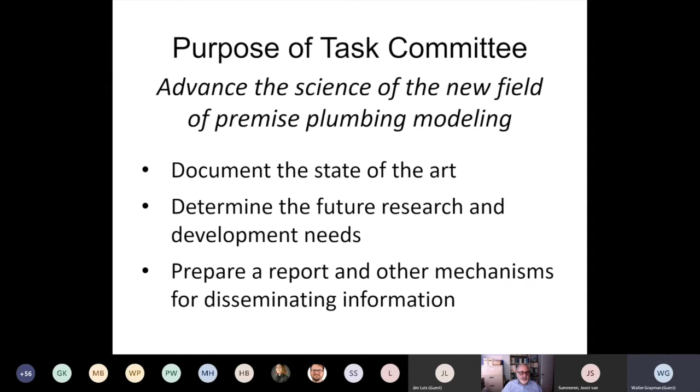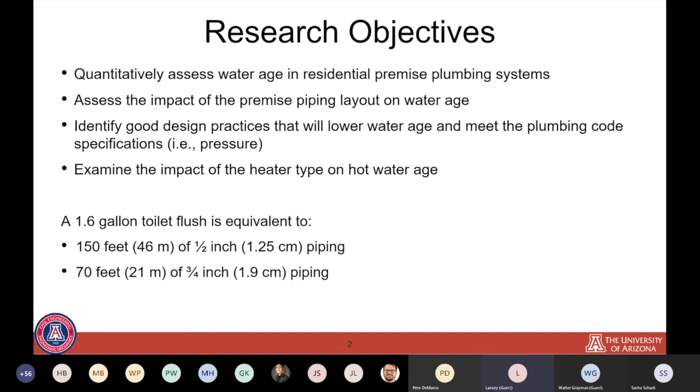So I'm going to shift this now to Sasha. He's going to go through some of the analysis and results, and I'll come back and talk about some further conclusions. Well, thanks so much, Dr. Lansey. So I'm going to start talking about the methodology.

We needed 3 major components. The first one was the premise water distribution system. I'm going to talk more details about that on the next slide. But we also needed a hydraulic model that was capable of calculating water age in pipe flow. For that, we used EPANET coupled with the MATLAB toolkit.

And the third major component we needed is the demands, for which we found in the literature the model by Blokker, which is called SIMDEUM, which we had to code in MATLAB with some modifications. We added splitters to have demands on fixtures of the same type. And we also added a hot and cold splitter, for which we assumed a target temperature, and we achieved that temperature by mixing cold and hot water with the objective of having hot water demand as well.

We ran the simulation for a 90-day period using a 1-minute time step. We considered age zero at the meter, as you can see here. And as Dr. Lansey mentioned, we considered 2 types of water heaters, a traditional or tank heater and a tankless or on-demand heater. I want to see if I can turn on the pointer. Okay.

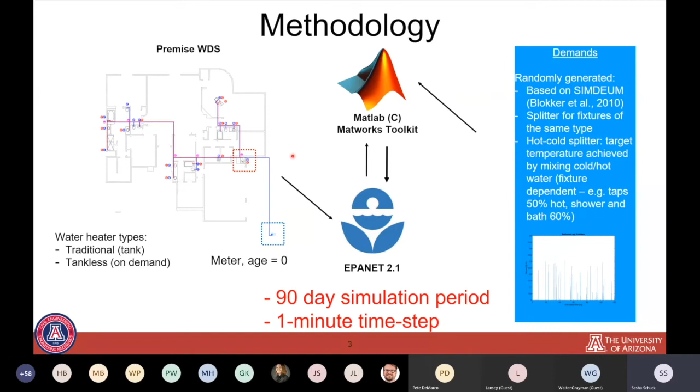So what we compared, as I mentioned, the objective was to change the layout of the premise plumbing system to see if we can improve water age. For that purpose, we tried with 2 different houses. The first one is smaller. It's only 1,300 square feet. It's 2-story, and we assumed 4 residents for that one. And we tried 5 layouts.

House 2 is a little bigger. It's single-story, and it has 5 residents, and we tested 3 layouts. So the other thing we tried, as we mentioned, is that we swapped the traditional tank heater, which we modeled using a first in, first out for the water age, for the water particles. And we swapped that with an on-demand, which is no tank water heater, at the same location, basically. And we designed the premise plumbing system to meet the 2012 International Plumbing Code criteria.

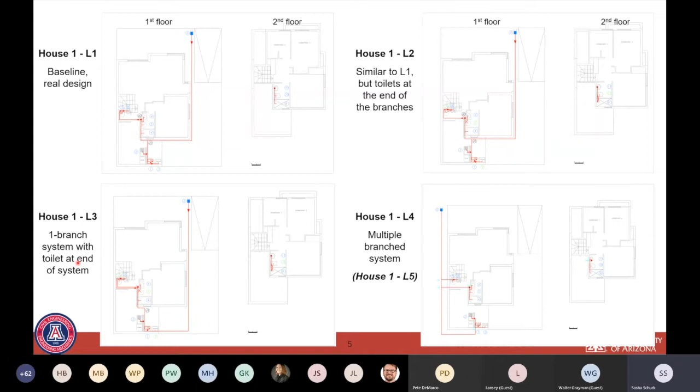So this is just to show you real fast the layouts for house number 1. The first one is just the baseline real design. The second one is pretty much the same as the first layout, but we put the toilets at the end of the branches to test the hypothesis that a good toilet flush will be able to flush or pretty much remove the old water from the system. The third one is a 1-branch system, whereas 4 and 5 are multiple branch systems.

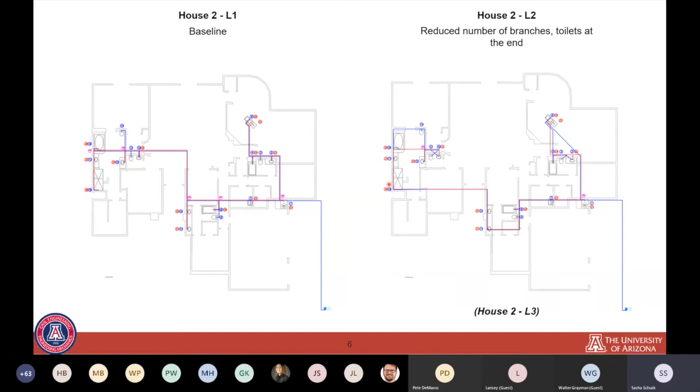And the same approach was followed for the second house. The first one is a real design. Number 2 is just basically trying to connect the toilets at the end. And a similar approach was followed for the third layout.

We looked at 3 statistics: the household maximum, which is the maximum residence time for all fixtures in the household; the mean fixture maximum, for which we calculated the maximum water age for every fixture and then took the average of the maximums; and the last statistic, the mean over time for all fixtures, which is just the mean for all fixtures over the simulated period for all time steps.

So I'm going to jump into the results and conclusions. What we can see here on the left is the results for house number 1, cold system at the fixture outlet. So at this point we can see the 3 statistics in different colors for different layouts. You can see that regardless of the layout, we're basically observing the same results with slight variations for the mean fixture max.

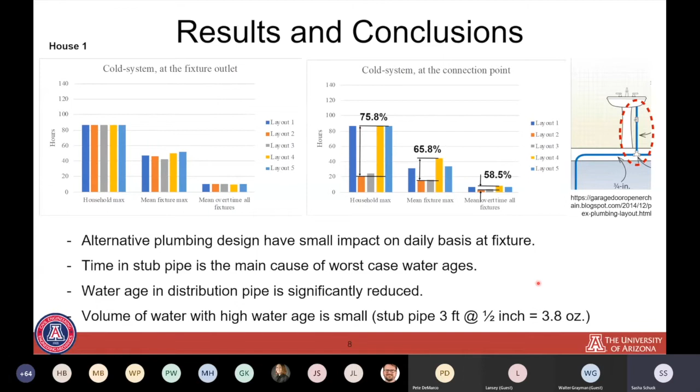So on the left side, I'm showing basically exactly the same results for house number 2, and the conclusions are pretty much the same. We can reduce water age by changing the layout. And if you compare the first layout against the second one, they were pretty much the same, but we connected the toilets at the end of each branch. And we can see that this is an effective way to reduce the water age at the distribution pipe.

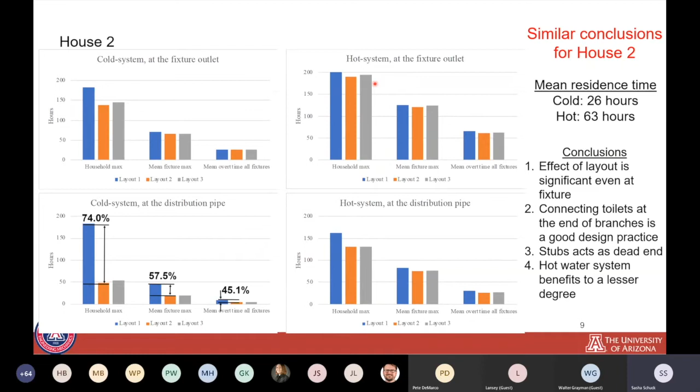Do you wanna? Oh, sorry.

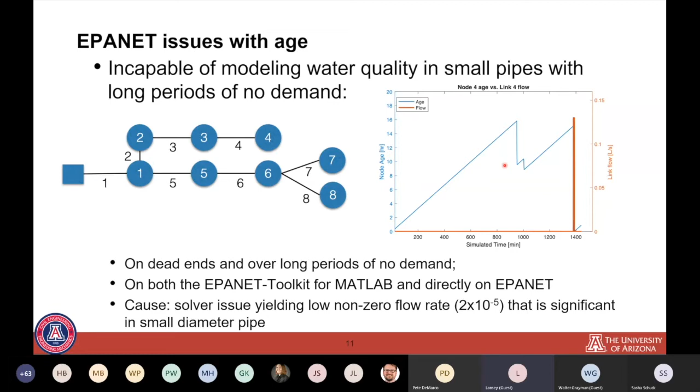So using EPANET is probably not the right algorithm for this, if you can go ahead one slide, Sasha, please. I'm sure KY Pipe and Kentucky people are jumping up and down right now saying yes, you should be using the node loop equations to be able to solve this and get rid of that 0 flow.

So we should be looking at some alternative model. We came up with a solution that was pretty tedious to work through by increasing the demands and increasing pipe sizes to make this work. So that's really number 1, that's a major thing, a major change, and I really hadn't thought about that until last night, that KY Pipe could handle this right off the bat.

In addition, this stub issue is really where the rubber hits the road, I guess, and we really need to understand what's going on microbially at those points. Is it in the water? Is it on the pipes? Can we flush it out with the water?

Extending this work directly, we think looking at looping systems to try to move water through, primarily because we don't know which fixture is being used in the house. We assume that they were uniformly used. So some toilets, for example, may not be used for a long period of time, and we need to get them to flush. We can use the auto flush. I know there's some out there on the market for cats that could cause your toilet to flush every now and then to reduce ages as well.

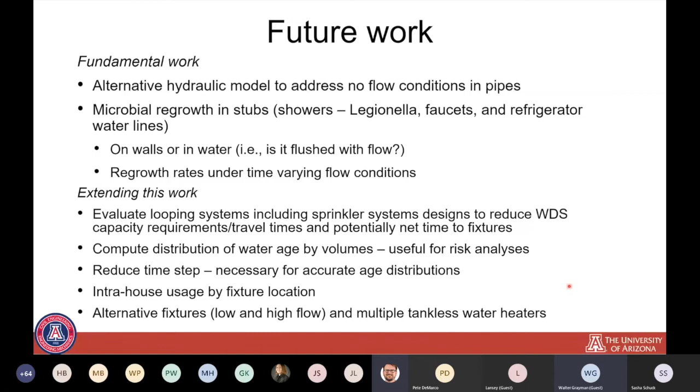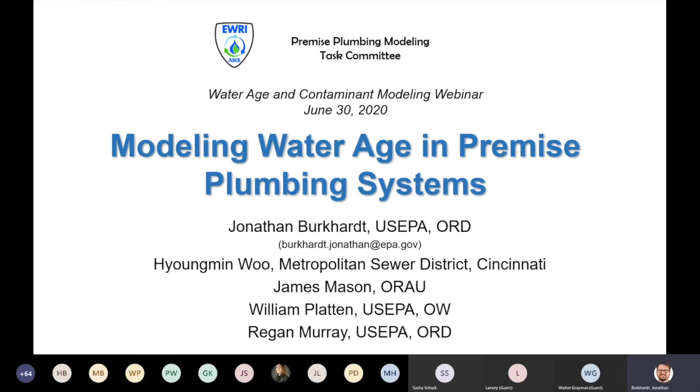All right, hopefully everybody can see my screen. My name is Jonathan Burkhardt, I'm with the US EPA Office of Research and Development, and I'm leading the premise plumbing modeling group here for a few different topics. I'd like to thank my co-authors for all the help they put in, and as always, this is my opinion, not the opinion of the agency. Just before I dig into it, I'll talk about EPANET 2.2, which addresses some of the issues that Kevin raised. We recognized a couple years ago when we started this work as well, about the stagnant flow. I've included a number of slides that are just more informational, and I'm happy to follow up with anybody, but I'm going to sort of breeze through some of the background.

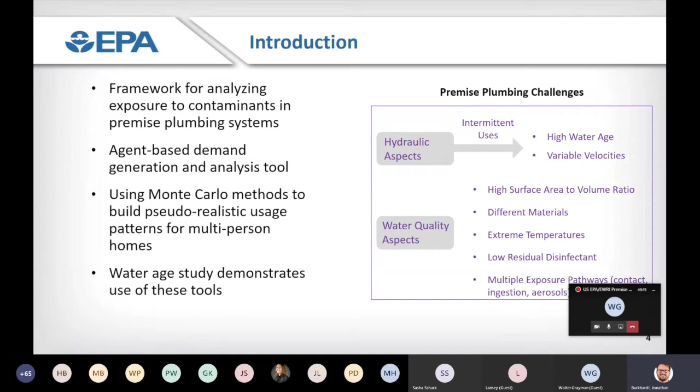We developed an agent-based demand generation model that was deterministic, not probabilistic, although probabilistic is in our future. We used Monte Carlo approaches to look at the effect of pseudo-realistic usage patterns on different numbers of people. One big issue was testing our demand model and looking at interuse frequency. A lot of people will just take the total number of uses, divide that into the hours in the day, and get somewhere around 30 minutes. I wanted to demonstrate whether that's correct or not, and how that changes.

We did look at some of the other models, although we initially decided to use our own. Highlighting some of the work that had already been done, we're actually talking about that more today.

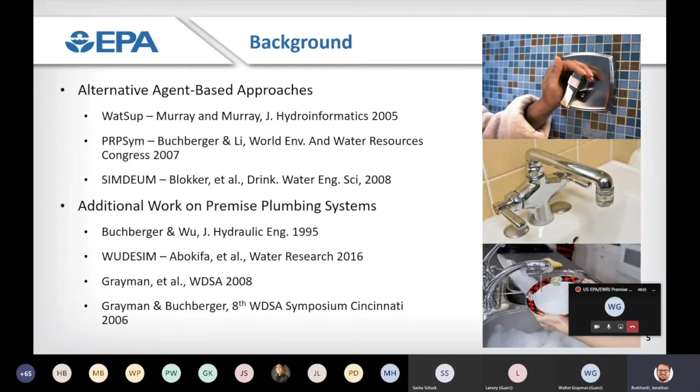Other work we've done using the premise plumbing models looked at lead. We have a lead modeling system in our building, and we've been modeling that, and also looking at the impact of dispersion. That was another side topic which we'll potentially highlight in a later webinar series.

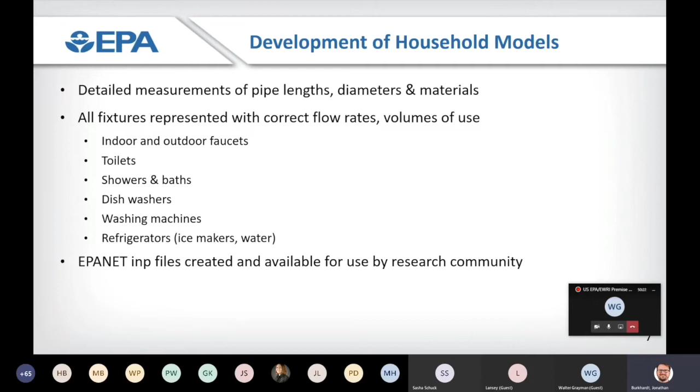As our last speakers talked about, we broke everything down into different fixtures - dishwashers, toilets - and applied different models for each of those usage groups. We modeled it at 10-second intervals to try to get as fine a gradation as possible on the uses.

We have some EPANET input files based on two houses - my house and one of my colleagues. We actually measured all the pipes and used those for today's talk. Again, very similar, and highlights what was talked about in the last slides, that the layout can play an impact on water age.

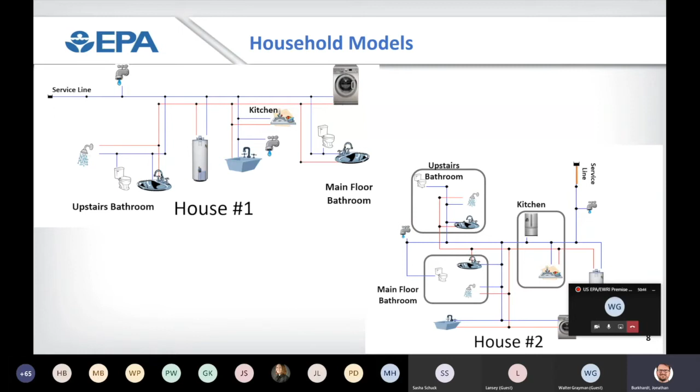I'm going to skip through the next couple slides. I'm happy to talk about these, but we'll be talking about them next month in a webinar series about demand estimation.

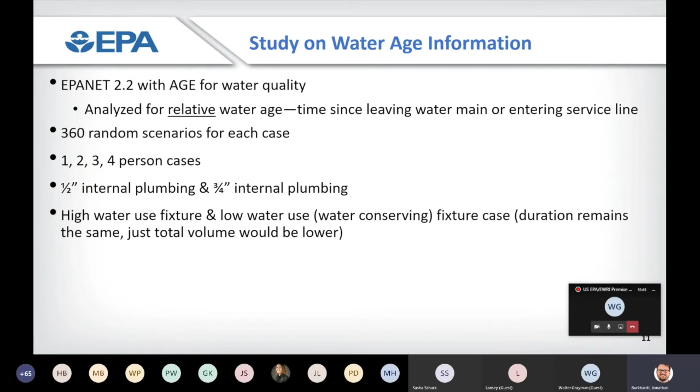We used EPANET 2.2 with water age. Similar to the last talk, this is relative age, just from the water main in the street. Each of these 360 random scenarios were generated for 1, 2, 3, and 4 people. We also looked at the impact of larger pipes in a house, although most houses are plumbed with half-inch, and applied high or low water use fixtures - if a house has fixtures or appliances that use more or less water, how would that impact it? Similar to the last speaker, we looked at the hot water heater as a source of where water age accumulates.

This is comparing results for house 1 versus house 2. Generally, as we'd expect, as more people live in the house, you have more uses, and because of that you get a decrease in average. In this case, plotting drinking water age, the median for four people has about the same likelihood of getting 1 hour old water for drinking, whereas for one person in both houses, you're getting about 3.5 to 4 hours as a median for drinking water.

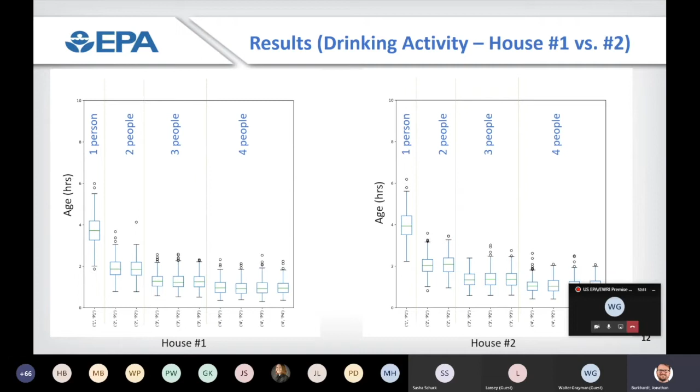On this slide we have cold versus hot water age - sorry for the technical difficulties on my part. On the left we have cold water use. Similar to what was plotted in the last slide, generally as more use or more people are in a house, the uses move earlier in age. Interestingly, on the cold water side, home uses - dishwasher or washing machine activities - have a high probability of very low age because of their high total volume. On the hot water side, home uses are now on the right, again because they're experiencing a lot of volume, but from the hot water heater.

We use the CSTR approximation in EPANET rather than the FIFO as the last speakers. But we can compare and contrast the impact of the hot or cold water use. Next slide.

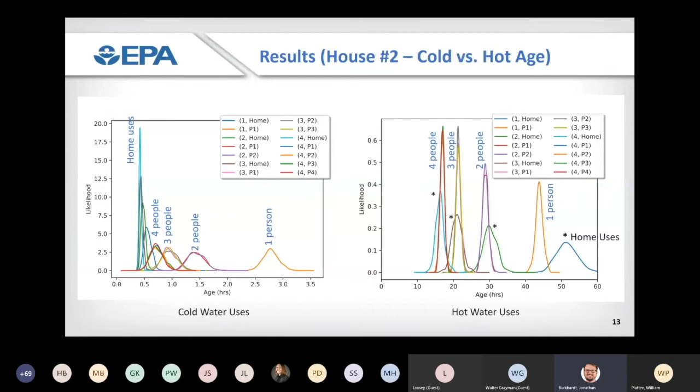So this one again is highlighting high versus low water use, whether the fixture had high or low GPM or total volume used. Again, for 1 or 4 people, showers tend to have very low age simply because of the total volume used. There are subtle differences between 1 to 4 people, generally reducing the age experienced for different activities, and with higher use volume per use, you get a decrease in water age.

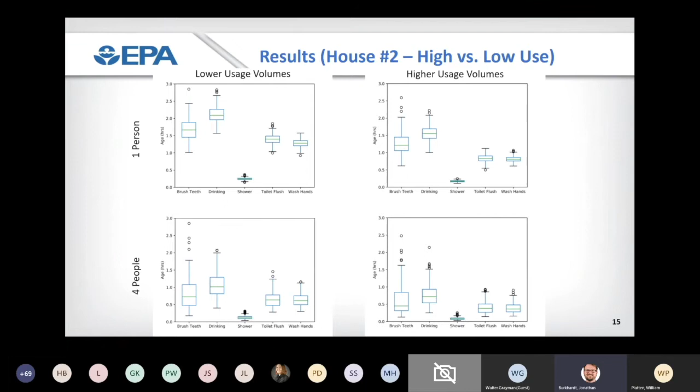Next slide. I think this is the last example, trying to show a similar plot to the last presentation, the maximum experienced water age for a drinking water activity. We can see the work and overnight stagnation periods highlighted, both around 8 hours. But I want to note the shift in scale where the max day versus mean day, the median is even for 4 people in that stagnation period, as we might expect. So one user in one simulation could experience that max stagnation of water, even with 4 people.

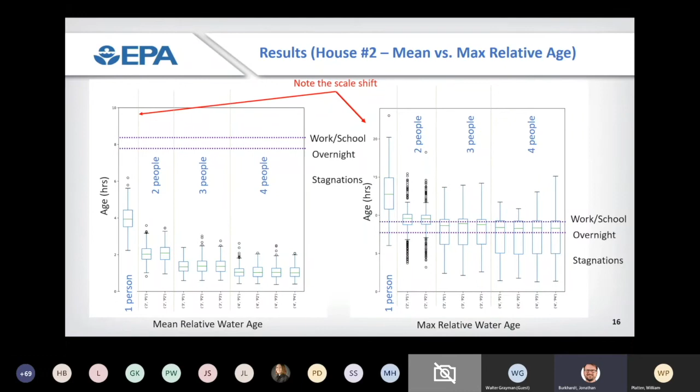The big conclusions from this: similar impacts, the number of people in a home and number of activities will impact the water age as we would expect. The type of fixture can also have a subtle impact. And the max relative water age that a person could, at least occasionally, encounter, can reach that max stagnation or long stagnation within a home.

We're continuing to work in this area, developing additional household models, expanding into probabilistic models. And we're going to be conducting studies on a real home system for flushing and other experiments. So I'll turn it back over to Walter.

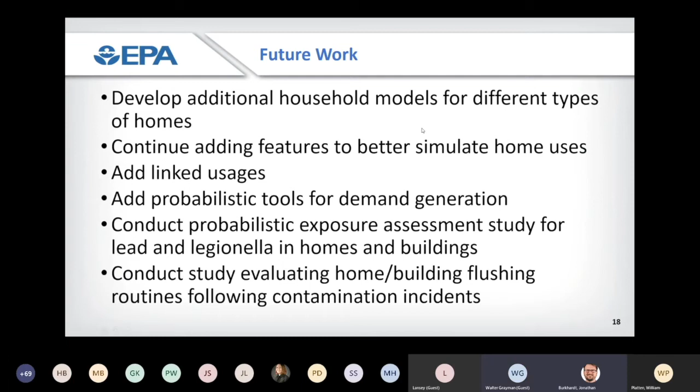Yeah, thank you, Walter. My name is Mirjam Blokker. I work at KWR Water Research Institute in the Netherlands. I'm the same Blokker that Sasha just mentioned, that the SimDeum model was made by. I also will show you something about water age and temperature modeling, where I used SimDeum as well.

A lot has already been shown. The original thought we had is that a branch system has relatively small diameters and short lengths in houses, meaning small pipe volumes, which would more or less mean that every time a tap is opened, the pipe is emptied. So water age is really determined by the time between taps. But if you look at what actually happens, it's not entirely true, because a lot of, especially at the kitchen tap, when you open the tap, it's just for a few seconds, and the pipe is definitely not emptied.

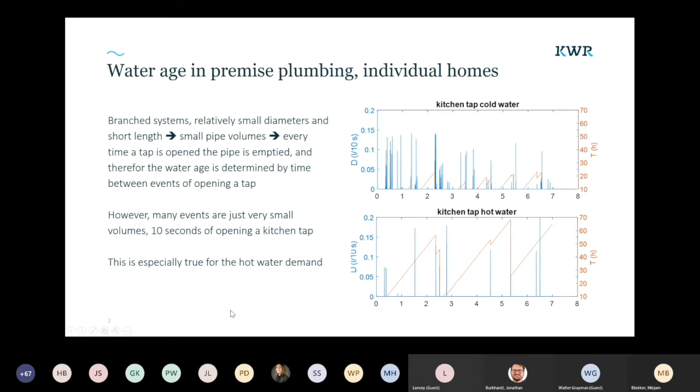So the rest of the presentation is basically about that. It's not just modeling, she also did validation.

The idea is that domestic sprinklers will be very useful in preventing fires or preventing fires from devastating the home. What we do not want is an industrial sprinkler system, because it uses too much water and too much pressure. Also, we don't want that because it requires testing every now and then to ensure the water is flowing, so you actually want to test that. We don't want that for a domestic sprinkler. It should just always work.

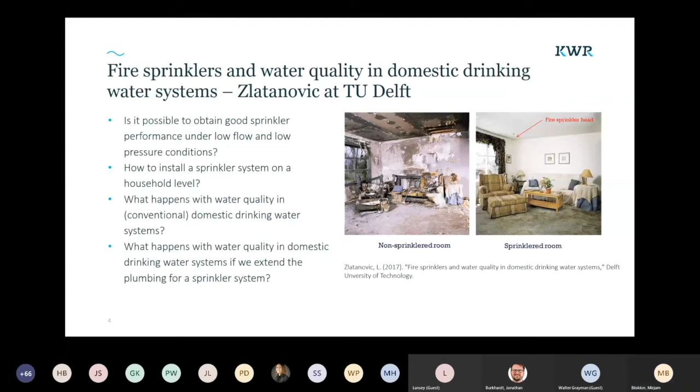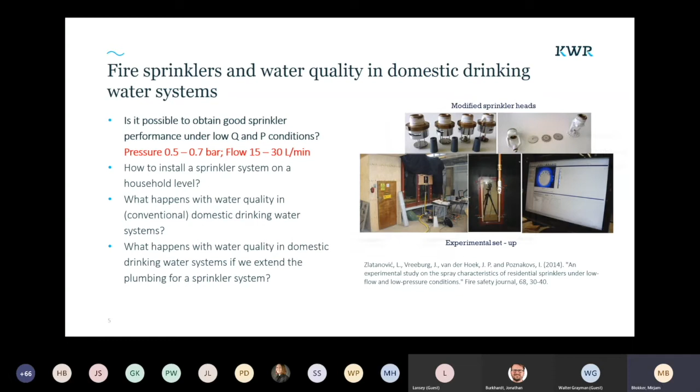So you can read the paper if you like, where she designed and extensively measured a new design for a domestic sprinkler head, and that was very successful. So yes, that works. She thought of different ways of putting that into a drinking water installation.

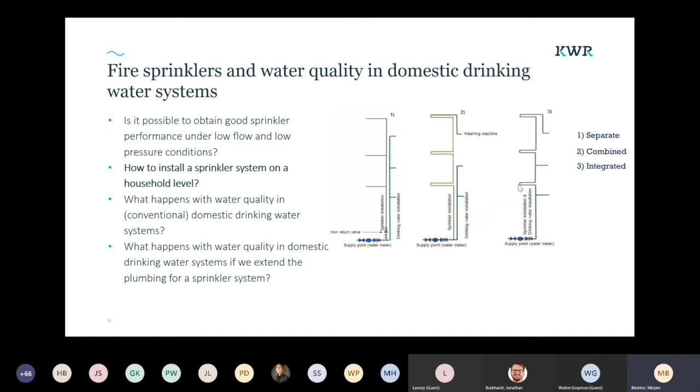So you could have two separate systems, one for drinking water and one for supplying the sprinklers. You could have a combined system where at least there's part of it being connected. So in this case, the washing machine is at the end of that, so there is some continuous flow. And then there's a fully integrated system where your drinking water installation is actually being extended in such a way that you could have a sprinkler somewhere in the middle of your ceiling, and it's all connected to the same pipe system.

So she built a really nice installation somewhere in TU Delft in the old elevator shaft. And then these actuators had SIMDEUM demand patterns on them for a whole year of probabilistic demand. So every day that the measurement took place for more than a year, every day was different. Each day was a different unique set of tap patterns. So there was a specific tap that simulates the kitchen tap. There was a tap that simulated the washing machine and the dishwasher and so on.

And we modeled what we would expect in temperature and other water quality related issues. So temperature, for example, was modeled and measured. So this validated the temperature model, which was very nicely done. And the results showed that it is possible to have the sprinkler system work and that the temperature model is able to predict the dynamics.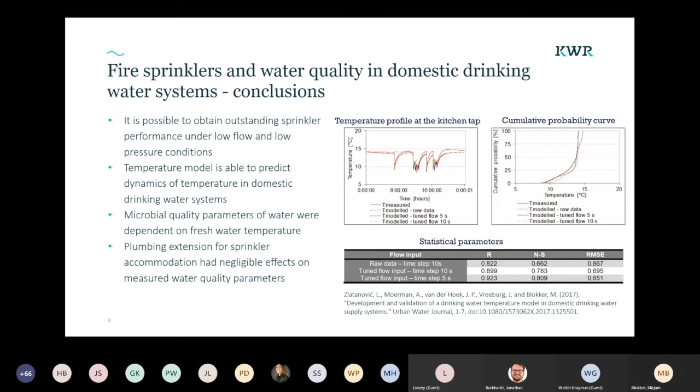Another project that we recently finished has to do with what if the temperature in your connection pipe or maybe the meter box is getting really warm. With the energy transition, which is a really big thing in the Netherlands, we expect that more and more district heating pipes will be close to our drinking water system. So the water might be really getting warm in the connection pipe, and then you would flush that out, but how does that travel through your distribution system or through your installation? So this is what we looked at.

And the graph here should show temperature. Well, anyway, we looked at the temperatures, and what you can see is that when you open the kitchen tap, the cold side, it might be such a short time that you do not really see the hot water getting there, because it's not the full pipe volume that's being flushed out at the kitchen tap. So this water travels a little bit towards the kitchen tap, but then stagnates in the pipe, and then it could cool down again. So a lot of water is getting warmed up in that connection pipe and then cooling down in your system again, and some of it might be going out the tap, but lots of it is just sitting in that system.

So that might have an effect also on the biofilm in the pipes. That would be a very nice next study object. So what we see is the water age is determined by water demand and the fixtures and volume of upstream pipes and the time between water uses. And that also means that there is a flaw in SIMDEUM for the hot water, because people will not just open the tap and then close it when they have enough water. They will close the tap after they have enough hot water. So that should be included. And water age influences interaction with pipe wall and joints and fixtures, etc. So it has an effect on water quality.

We looked at temperature. The next project we're starting on is the leaching of lead. And then biofilm growth is the next step for that. And for temperature modeling, this is an interesting thing: there's a difference between vertical and horizontal pipes in how fast they heat up, depending on room temperature, because convection around vertical and horizontal pipes is different. So in EPANET and EPANET-MSX, we had to really set a value to each and every pipe, saying it's a horizontal or a vertical pipe.

So future work that we need to do, or that we're working on, that we think is important to take into account, probably with some sort of an automatic way, is determining which pipes are vertical and horizontal. We do not want to model just pipes, but also the joints. That's also where lead could be.

I just want to acknowledge my co-author, Rakesh Bahadur, a colleague who works out of our Reston, Virginia office, and also two other members of our project team, Walter Grayman, who developed the model and performed a lot of the modeling work that you'll see today, as well as Rick Borgia from Arcadis, who did building and plumbing assessment for this project.

So this project dealt with contamination modeling in high-rise buildings. It was a New York City case study. Next slide.

So the goal of this assessment was to identify equipment and components of a typical domestic water distribution system in high-rises and large venues in New York City, and to understand how these systems work. So we developed some models to look at the movement of contaminants within different types of buildings. The focus of this presentation will be on the high-rise building.

We also considered in the modeling both accidental and intentional contamination events, and also contamination both from external sources as well as internal contamination. The funding for this was provided by the New York City Department of Health and Mental Hygiene, the Office of Public Health Engineering, and we worked closely with their chief engineer, James Luke, in performing this study. Next slide.

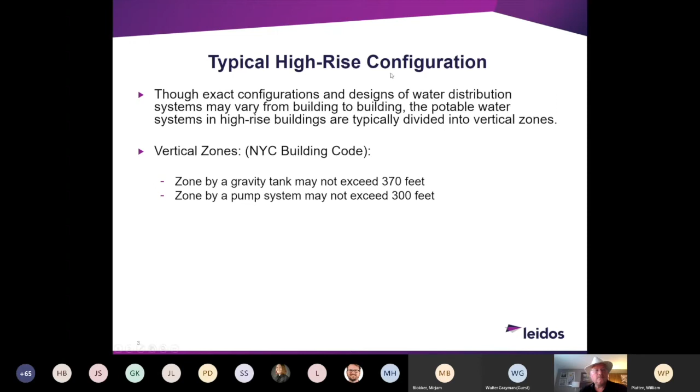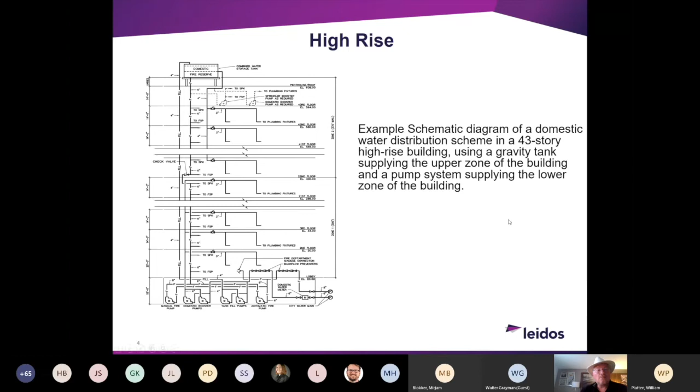If we look at gravity house tanks, they serve as the main water supply of typical high-rise buildings in New York City. Due to the excessive height of high-rise buildings, it became a disadvantage to use a pump to supply and maintain the pressure and flow required for the domestic water distribution. This is especially true in very tall buildings, where the use of gravity storage tanks started and has become very popular.

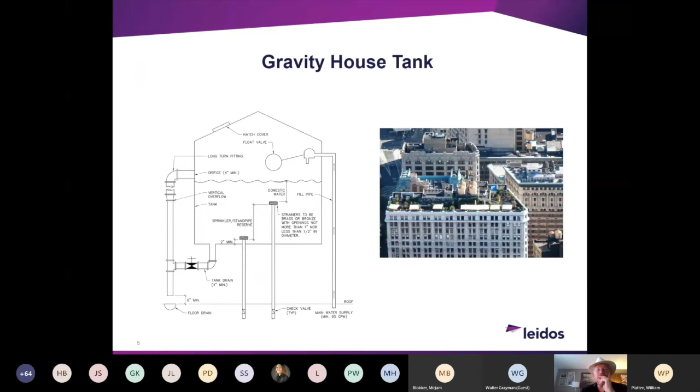So if we look at the flow and pressure characteristics, typical design flows for large commercial buildings can range from around 65 to 400 gallons per minute per service connection, depending on the number of house tanks, booster pumps, and fill pumps in a building. The length of the connection and the presence of appurtenances such as valves and fittings vary depending upon the specific local requirements and also conditions.

A service connection to a building is typically designed to a maximum working pressure of about 200 psi. However, the internal plumbing fixtures and equipment are generally designed to lower working pressure. Thus, it requires a pressure reducing valve to reduce the incoming pressure before supplying the plumbing fixtures and the equipment. Next slide.

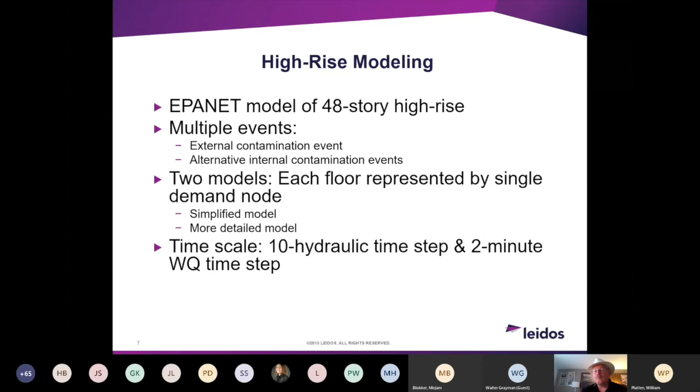So in our high-rise modeling work, in order to test the potential impacts of a contamination event in a high-rise building, hydraulic models representing two generic large venue buildings were constructed using EPANET. The models were used to investigate the movement and spread of contamination for alternative contamination scenarios. And scenarios investigated included different locations for the injections and different injection quantities, durations, and times. Next slide.

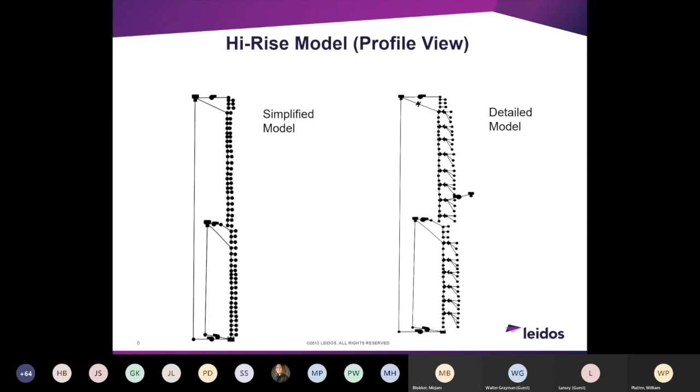So we developed 3 high-rise scenarios. Actually, there were more than that, but I'm just going to talk about these 3 due to our time constraints. First of all, there was external contamination of the distribution system, and in this case, it was a 400 milligram per liter concentration inflow for 3 hours starting at noon. There was an internal contamination of a roof tank, a 200 milligram per liter instantaneous contamination starting at midnight.

And then finally, the third scenario was an internal contamination event, 55 gallons injected over a 2-hour period on the 27th floor of this building. And there were 2 cases that I'll talk about here. One was a low head pump or a cross connection, and the second was a high head pump. Next slide.

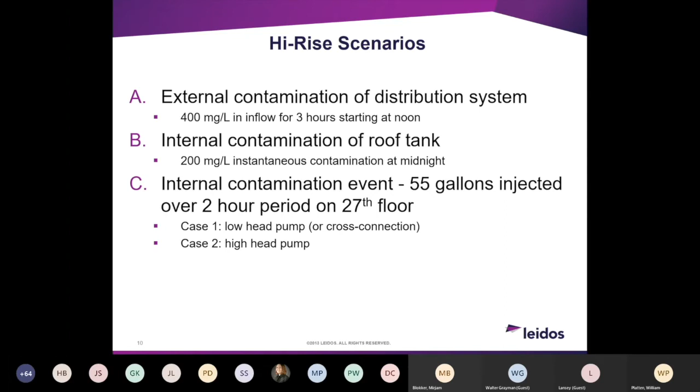So let's talk about that first scenario and a little bit of the results here. So as illustrated by the pump flow and the water levels in this slide, during the nighttime when water usage in the building is very low, little water is used from the tanks, and as a result, the pumps do not need to be operated to fill the tanks.

With the increased demand when the workday starts, the water levels in the tanks quickly drop and the pumps cycle on around 7 a.m. The resulting concentration in the roof tank is shown here in the lower left. So as illustrated here, the concentration is above the assumed LD50, which was set to 100 milligrams per liter in this case, for approximately 6 hours.

It then dropped to a lower concentration as the tank subsequently refilled with clean water. And as illustrated, a spike in concentration in the tank resulted in an increase from 135 to 155 milligrams per liter, and that occurred around hour 18, which is about 3 hours after the initial contamination period ended. This behavior was caused by the residual contamination that remained in the riser pipe after the pump was shut off about 1:30 p.m. Next slide.

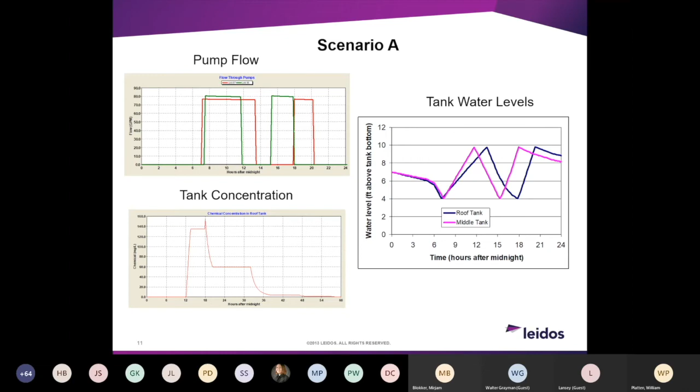Okay, can we move to the next one? Scenario B. I changed it. It's okay. Just catching up, I think. Sorry.

So here we're looking at the second scenario where there was a tank contamination, here on this curve. So in this example, the top tank is instantaneously contaminated at midnight, resulting in a concentration that is twice the LD50. So as illustrated in this figure, because of the low water usage during the night, the pumps do not operate and the concentration in the tank remains at the same value until about 7 a.m. when the pumps start in order to refill the tank. That results in a drop in concentration throughout the day due to dilution. Next slide.

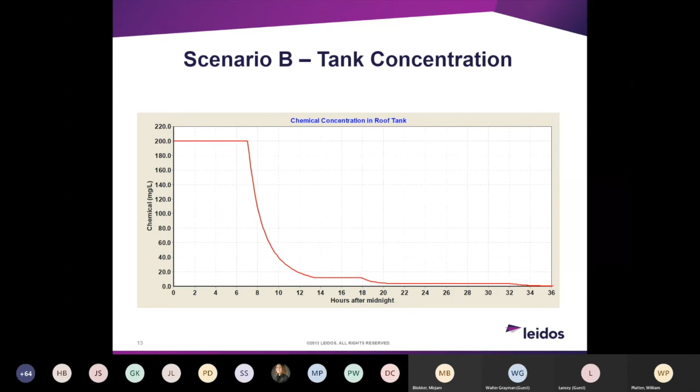Okay, so this is the final scenario, and we're just looking at nodal concentrations here. In this scenario, on the left here, a low head pump is used to inject the contents of the 55-gallon drum over a period of 2 hours starting at noon. The movable tank and pump combination is attached to a fixture such as a utility sink on the 27th floor. The pump is capable of overcoming the pressure on the downstream side of the PRV, but cannot overcome the pressure on the upstream side. As shown in the figure on the left, as a result, the contaminant affects the water usage on floors 25, 26, and 27 served by the PRV on floor 27.

In the next case, shown on the right, a higher head pump is used that is capable of overcoming the pressure on the upstream side of the PRV. However, as long as the demand on the downstream side of the PRV, which is associated with the usage on floors 25, 26, and 27, exceeds the rate at which the contaminant is injected into the fixture, the contaminant will stay within the 3-floor zone and not affect the other floors. When the water usage on floors 25, 26, and 27 is set to 0, only then will the contaminant move through the PRV into the main riser. So as shown in this figure, when the contaminant enters the riser, it will mix with the water that is coming from the tank and move with the flow, i.e., towards lower floors, resulting in contaminated water feeding those floors. Next slide.

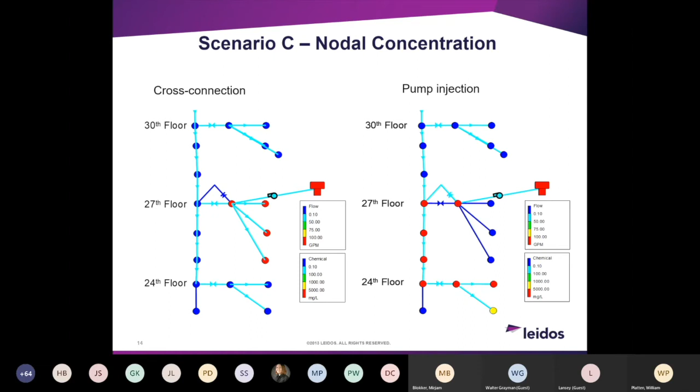So just to summarize, hydraulic models proved to be useful for estimating the spread of the contaminant and the resulting human exposures. And several different scenarios were modeled for the high-rise and also low-rise buildings, which I did not present here, to demonstrate the likely consequences of various contamination schemes. So impacts depended upon the location of the entry point, the duration of the event, the time of the event, and the quantity of contaminant introduced into the system.

And with respect to future work to continue these types of studies, there would need to be additional information defining the demand patterns. We had a very simple demand pattern here. Defining the range of operations and designs of these buildings; we only looked at a small handful of buildings, high rises in New York. Looking at additional scenarios, and then verification and validation of assumptions and results.

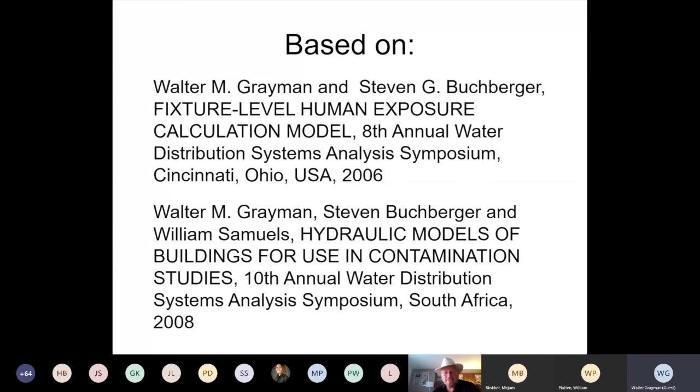This was in the era when water security was a big issue. And the purpose was to demonstrate the calculation of human exposure patterns from a hypothetical contamination event and its impact within the house. We wanted to look at and demonstrate different methodologies for logging water use within a house, and also as a proof of concept for modeling movement of a contaminant through a house.

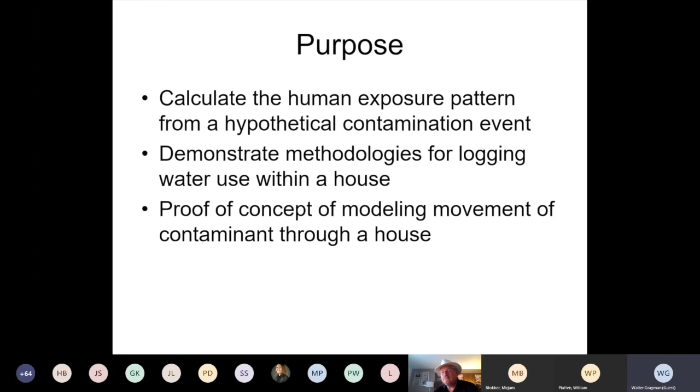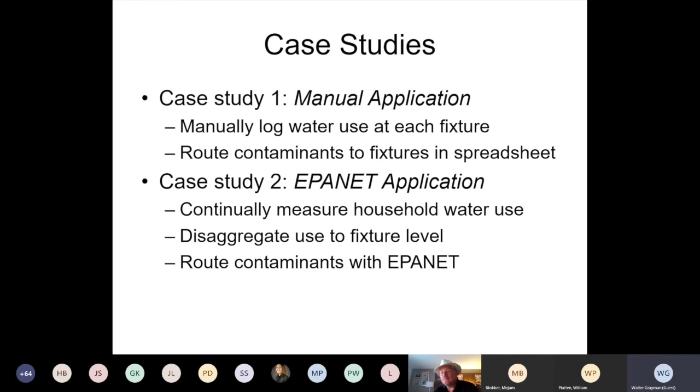Remember, this was almost 15 years ago. We did 2 case studies. The first one was really a manual application using spreadsheet. And the second one was an EPANET application, more similar to what we've been hearing today.

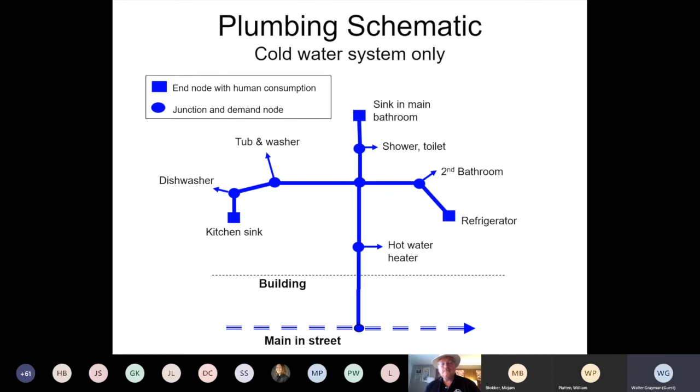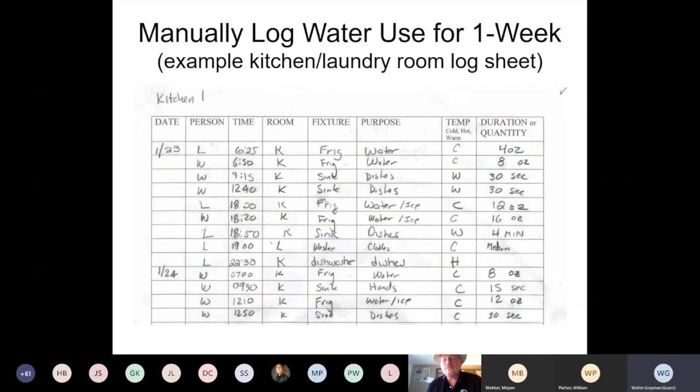As I mentioned, we manually logged every water use for a week. My wife did not appreciate that, but this is an example logging sheet where we were at the time, the fixture, the purpose, the temperature, and an approximation of the duration or quantity. This was transferred to a spreadsheet, and really an event-based one, which allowed us to do the calculations as the water moved through the system towards each one of the demand-oriented events.

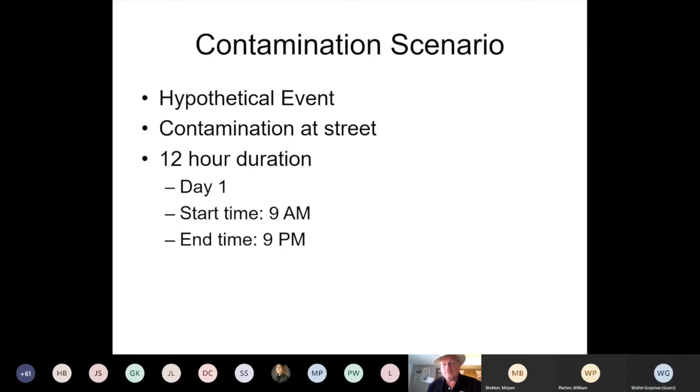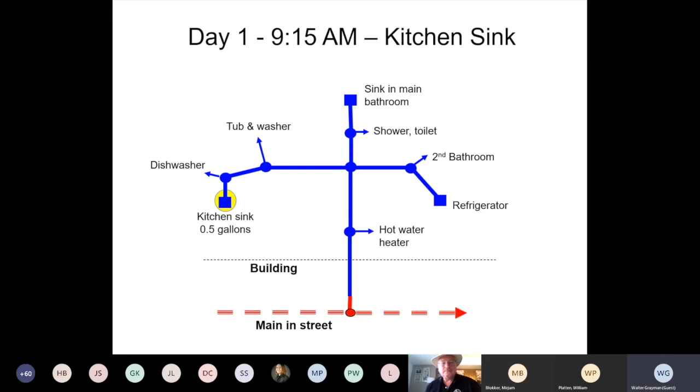Contamination scenario we used was a 12-hour duration on day 1, starting at 9 a.m. at the street and ending 12 hours later. So I'll do a very quick little animation and just show it as this is a start. We see at the street, it's contaminated, and various events occur. It's a fairly long driveway, so it took 9 hours for the contaminated water actually to reach the building. And then as various uses were taking place, it was drawing it into the building. I'm showing only example events.

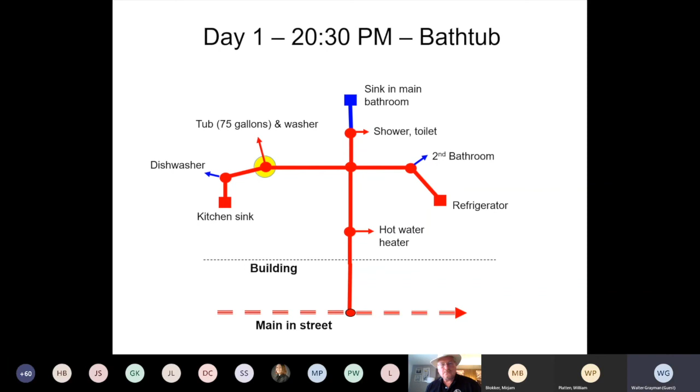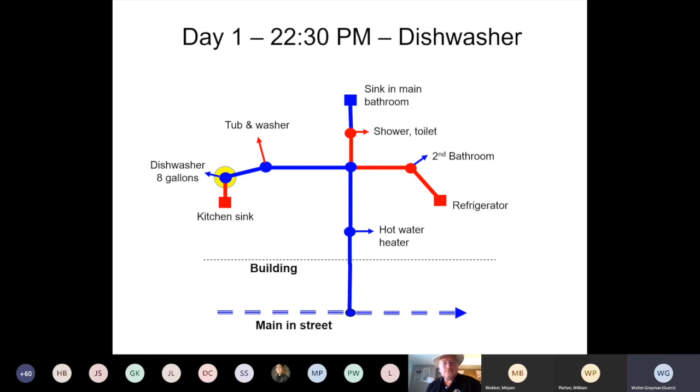And at 2100, 12 hours later, the contamination ends, and we continue to do the routing as the clean water enters the building. And it was 27 hours after the start. No contamination remains in the house in the cold water system.

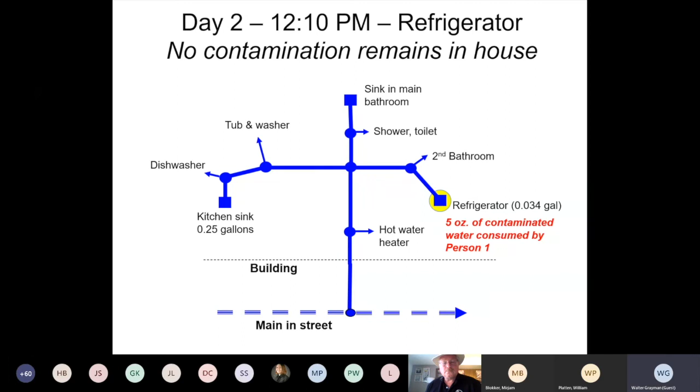We did various statistics in terms of the amount of water that was used, the amount of water that was consumed, the amount of water that was contaminated, and the exposure by 2 different people. And as I indicated, it took 9 hours for the water to actually reach the building, and then an additional 15 hours before it was totally clear. And we feel this demonstrated the feasibility of modeling contaminant movement in the house.

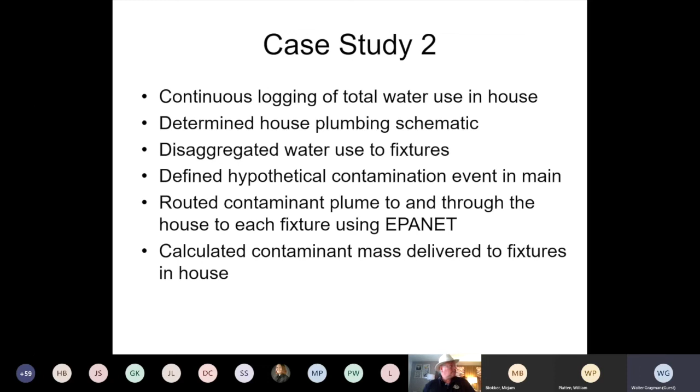Case study 2 was the more sophisticated one, and Steve used continuous logging of total water use in the house, determined the house plumbing schematic, disaggregated the water use to the fixtures, defined a similar hypothetical event, and then routed the contaminant plume to and through the house to each fixture in EPANET and calculated some statistics.

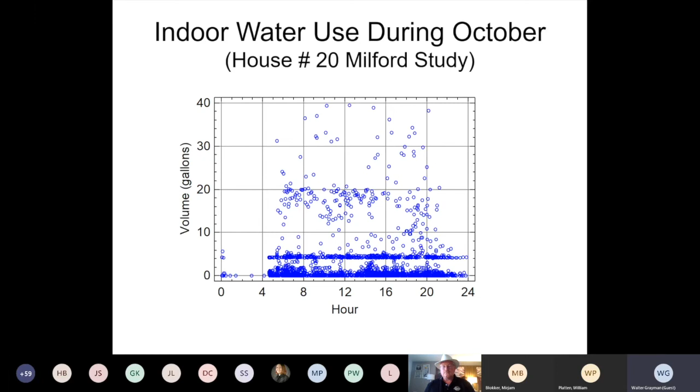These are some results from a very well-known study that Steve did back in the early part of the century in Milford, Ohio, and it shows the indoor water use during the month of October. And he went through some various mechanisms for simulating disaggregated daily hot and cold water demands, and then into a stochastic fixture level water use. And I'm sure he'll be talking about this a lot more at next month's webinar.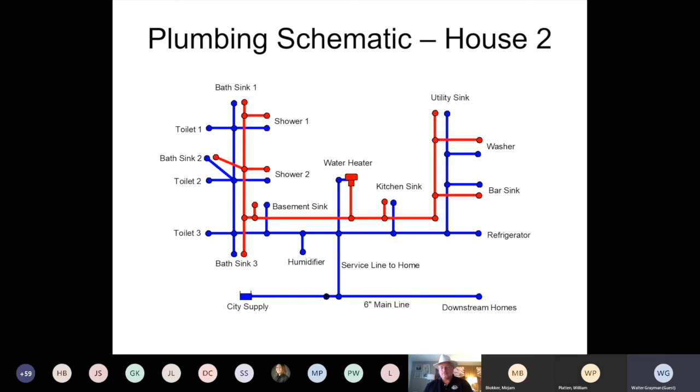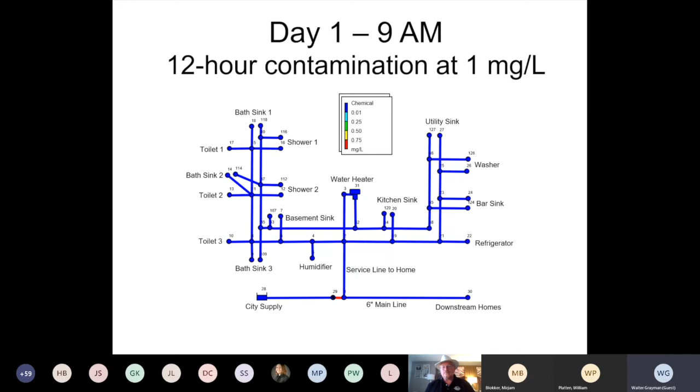This is the plumbing schematic, and this is both the hot, shown in red, and the cold, shown in blue, in the house. Again, at 9 a.m., the 12-hour contamination started. We show it then 12 hours later, as it's moving through the house. The red is the cold water system. It's showing a concentration of 1 milligram per liter, which is what entered it, and it doesn't change. In the hot water system, it decreases because of mixing within the hot water tank.

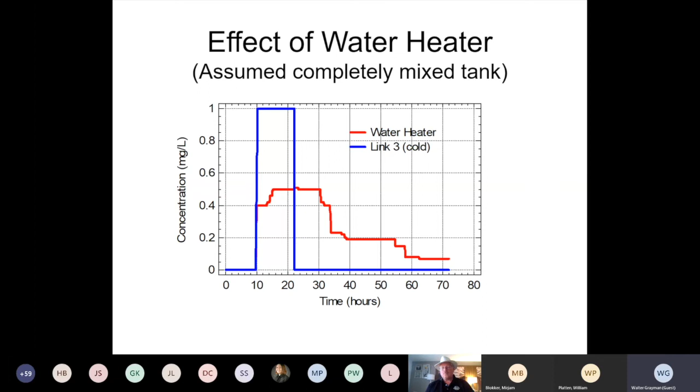And then by 9 p.m., it's cleared from the cold water system, but continues on in the hot water system. These two plots are a time plot of the concentration. The blue line is at the node right where the hot water heater comes off, and as we see, it's a pulse, whereas in the hot water in that tank, we have this diminishing as it mixes, and then the amount of concentration decreases over time.

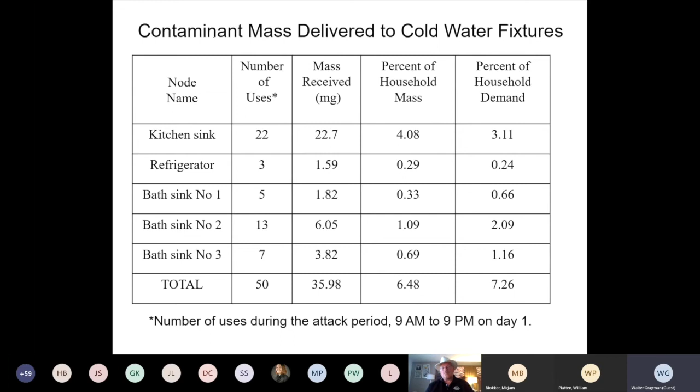Various statistics were calculated in terms of the contaminant mass delivered to the cold water fixtures.

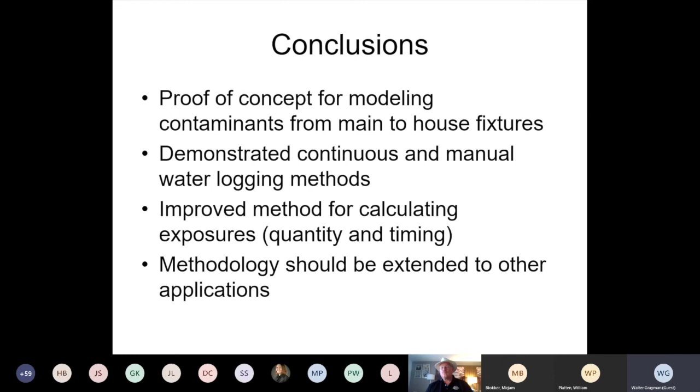In conclusion, we felt this was a good proof of concept for modeling contaminants from the main to the house fixtures. It demonstrated both a very simplistic manual water logging method and a continuous automated logging. It gave us really different results when compared to some of the exposure analyses that were done, where you're assuming that the water reaching the house or reaching the connection is representative. We find that it differs quite a bit when you actually look at how it affects the residents. At that time, we said the methodology should be extended to other applications.

In terms of needed future work, as several people have noted: a stochastic representation of fixture level demands, water quality transformations in piping systems, various things related to hydraulic processes, pipe dispersion, hot water heating mixing. And since we did everything manually in terms of building the model, integration with CAD and BIM systems to facilitate network construction and display of results.

And at the bottom, what we felt quite strongly is that there needs to be very close interaction between modelers and practicing engineers and plumbers, something that we feel our task committee has representing.

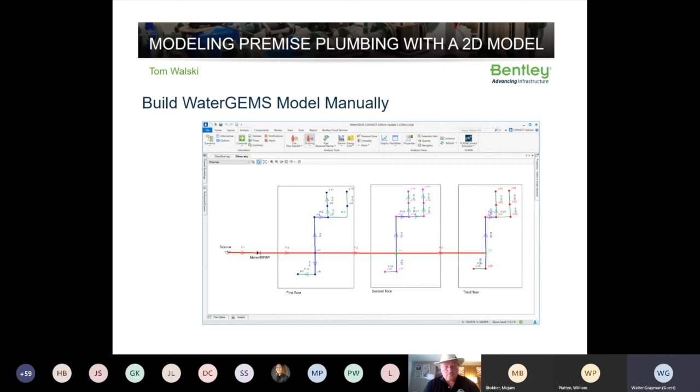Before going to the discussion, I just wanted to bring up a paper that Tom Walski gave at our first webinar in April, in which he did a similar type of analysis with modeling premise plumbing. He was using the proprietary WaterGEMS model, and he manually constructed a model of a 3-story house, then modeled water age, showing on the left the time series of water age on the top floor, and on the right a snapshot of the water age throughout the house.

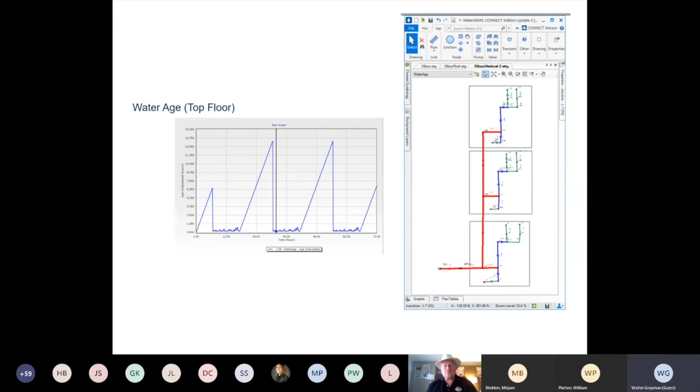So that brings the end to our presentations. We have about 20 minutes now for somewhat structured discussion. There are 3 topics I'd like to cover.

First, what are future research and development needs? What are the gaps and needs? I'm going to ask the question: have we missed anything? And then finally, what's next? Time permitting, we'll see if we can bring some people in on this discussion.

So I took the results from the 5 presentations and tried to summarize what was said in terms of needs. Most of the presenters mentioned demand estimation and the need for fixture level stochastic demand. We're going to hear a lot more about that in next month's webinar.

Water quality transformations in piping systems: pipes, joints, microbial regrowth, etc. Hydraulic processes, some that were mentioned: pipe dispersion, and hot water heater mixing, which has quite a bit of effect on the water age and contamination going through hot water heaters, looping systems, which are starting to come into residences, and no-flow periods. How does that affect things? Household models: looking for default models and additional household scenarios and features for different types of homes.

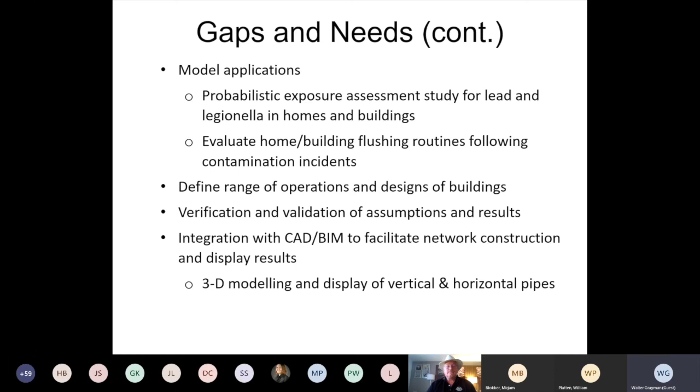At this point, I'd like to take maybe the next 10 minutes and open up, and let's just brainstorm on what are some of the other gaps and needs. Let's hope we don't get a free-for-all, but if you'd like to make a contribution, I will try and capture it here on the screen. So just open up your mic and go ahead.

This is Jim Lutz. Can you hear me? Yes. I would like to suggest working with the energy simulation modeling community. They've been doing pretty exciting modeling of energy in buildings and also air quality in buildings, and they've been working on it around the world. They've been going for a couple of decades now, but they don't seem to be touching water at all, just barely hot water.

Okay, thank you. And one of our later webinars is on hot water, and that's scheduled currently for January 2021.

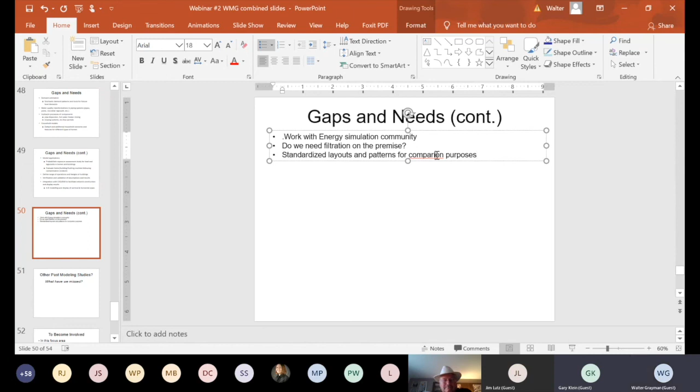I think we need to have standardized layouts for different occupancies so that our results are comparable with different modeling techniques, and the same for standardized water use patterns. I would recommend that we look at the extremes, the ranges of use patterns and layouts, and spend our time modeling the boundaries and analyzing for the boundaries, then checking in the middle, rather than doing all different categories of things. It's just too many patterns to play with. So we need to do range bounding or something like that in order to keep our work reasonable in time.

Tim Bartrand here, along with what Gary just proposed. If there are standardized layouts and patterns, we'd need data that go with those — data of all sorts, water quality data, tracer data, but data for validating if everybody's using the same layouts.

Yeah, and to go along with the standardized layouts, I would also add that high-rise buildings seem to have a plethora of different designs that waste energy but are cheap to install. So I think the design needs to take into consideration energy cost versus first cost. In some of these buildings, you need to spend a little money up front to make sure you save energy over the life of the building. Because some buildings that use the roof tank end up causing you to have a much larger structure in the building, and then they create a condition where you're using pressure reducing valves — I call pressure reducing valves 'energy wasting valves,' because you can design a building with no pressure reducing valves.

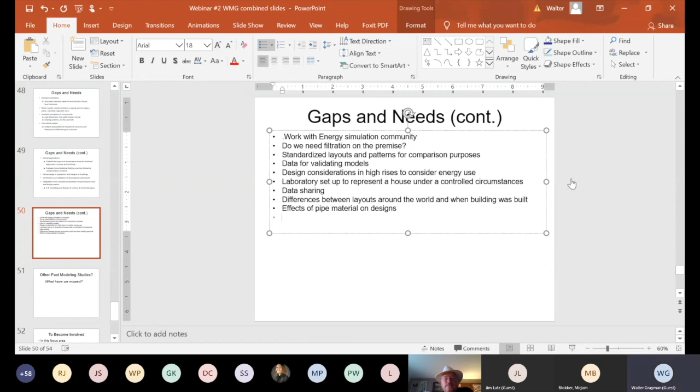There's another point related to the materials. In the US, most domestic plumbing that I'm familiar with is based on copper tube size equivalent piping, not the schedule numbers used in other applications in buildings. So the copper tube size pipe has a standardized outside diameter, and the inside diameter varies based on the material used to make the pipe.

I'm not convinced that's true elsewhere. So when we talk about 1/2 inch nominal or something with a similar number — 12 millimeters or 15 millimeters, whatever that number is — we need to make sure we are clear across cultures here. What do we mean by the pipe size? I think having some standardized tables that we all agree to and compare — I know they're in the literature, I get that — but when we're presenting that information, we ought to be really clear about what we mean by the pipe, because we're trying to compare results from different places.

Related to the pipes, emissivity varies greatly between the materials of the pipes. The conductivity of the material itself varies, but when you put pipes in a building, we typically don't have them touching the building very much. So conductivity to the building is probably very different than the conductivity of the inside to the outside wall of the pipe. I think we need to do some more work looking at that to make sure our models track correctly.